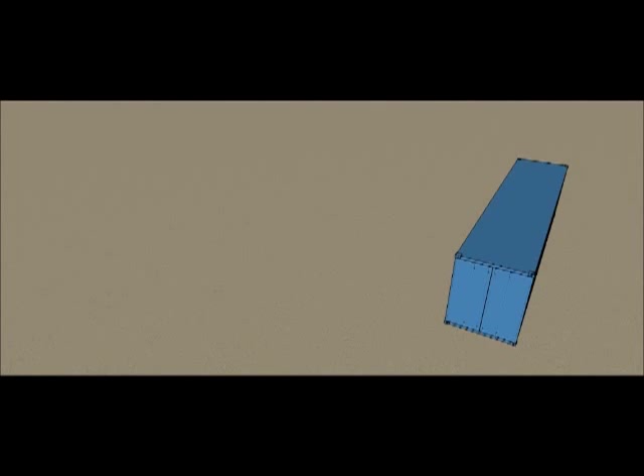Firstly, all materials required for the building structure arrive panelized in containers ready for construction. The wall panels provided are ready for quick connection at the job site. Your first task is to set out the floor foundation ready to take the building. This is a very simple job of excavating about a 150 mm deep footprint and pouring a concrete slab.

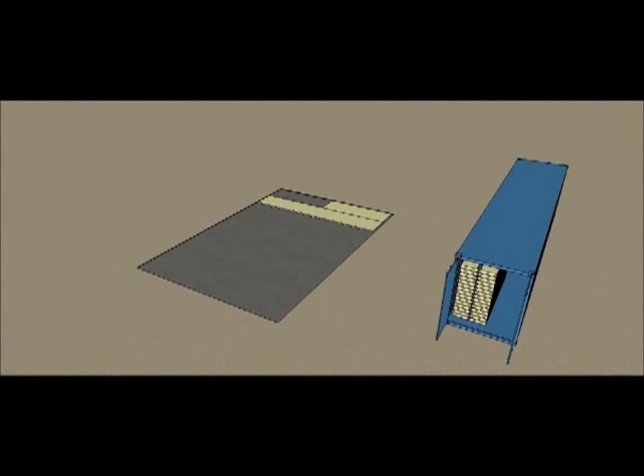Into the wet concrete the steeled floor panels are inserted to create the ground floor of the building. The panels should be clipped together and will find their own level by being floated into this free-flow, self-leveling concrete. This forms the first part of the foundation raft system, which will be completed when the top side of the floor slab is poured later in the construction process.

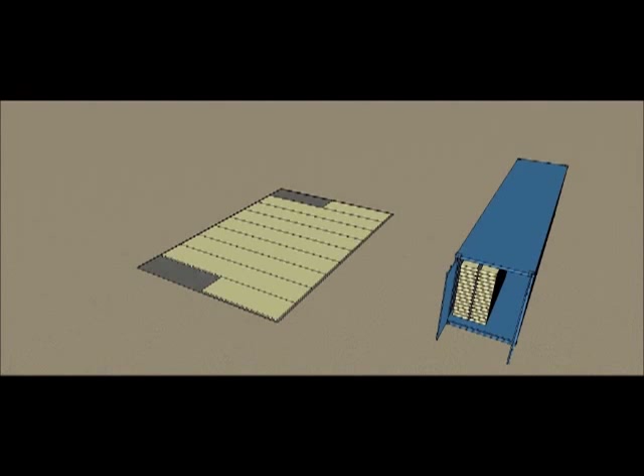The benefit of this system of foundation is that it is very fast, easy, low cost, accurate, and can be used even in poor soils without requiring deep excavations. Once the floor panels have set in place, normally 24 hours later, you can start erecting the ground wall panels as designated by the floor plan provided.

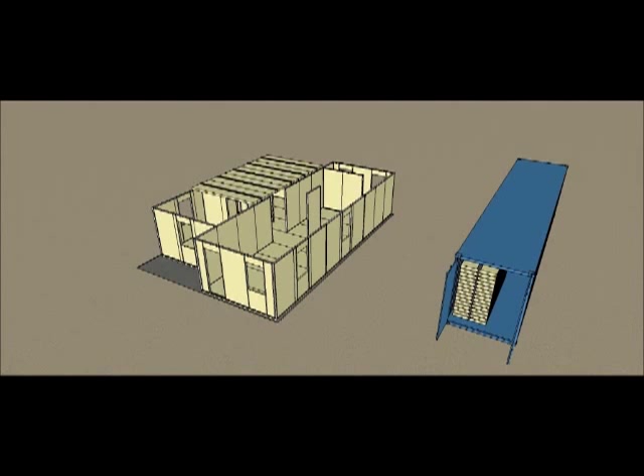They are simply clipped into place using wire clips provided. The panels are screwed together where the cold form steel surrounding the panels meet. This simple process takes only a matter of a few hours. The mid-floor panels are lifted into position one by one and sit on top of the walls. They are fastened to the walls by clipping the wire mesh of the walls and floor panels together.

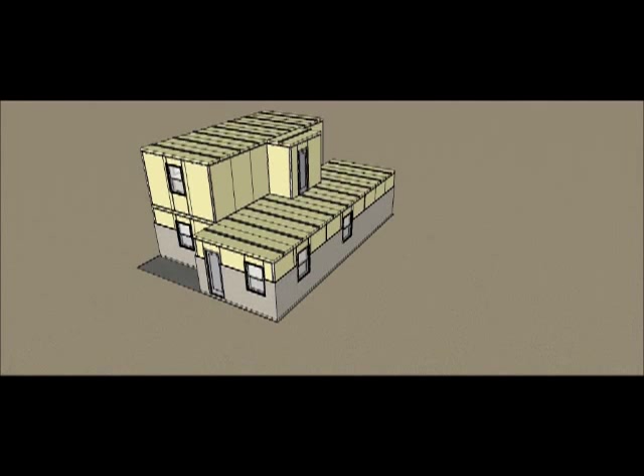Once the roof panels are in place, the building structure is ready for the application of the concrete. The client is responsible for all concrete supplies and the application to both sides of the walls, mid-floor, and roof panels. The concrete is applied generally in two coats. The first is applied using a concrete pump sprayer, and the finish coat either sprayed with an air sprayer or troweled on by hand. The surface can then be smoothed off or textured using a combination of trowels and screeds.

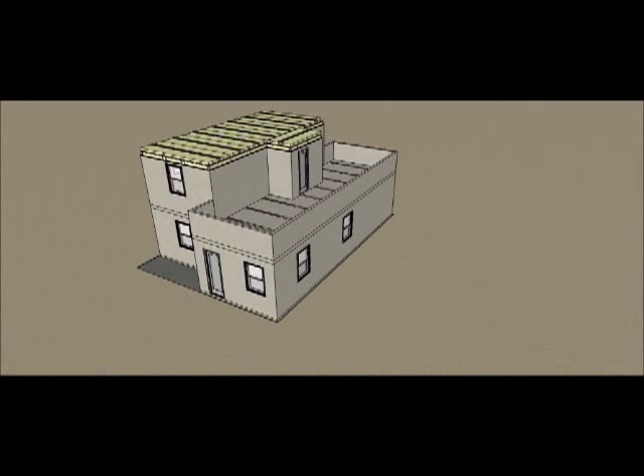Floors are generally poured and floated off in the normal way. The total concrete thicknesses are generally around 30 mm on either side of the walls and similar on either side of the floor and roof panels. Finally, an elastomeric paint should be applied once the concrete has cured to cover any surface cracks and to waterproof the building. The whole process of building a 2-story, 100 square meter home should not take any longer than 10 working days with a team of 3 or...